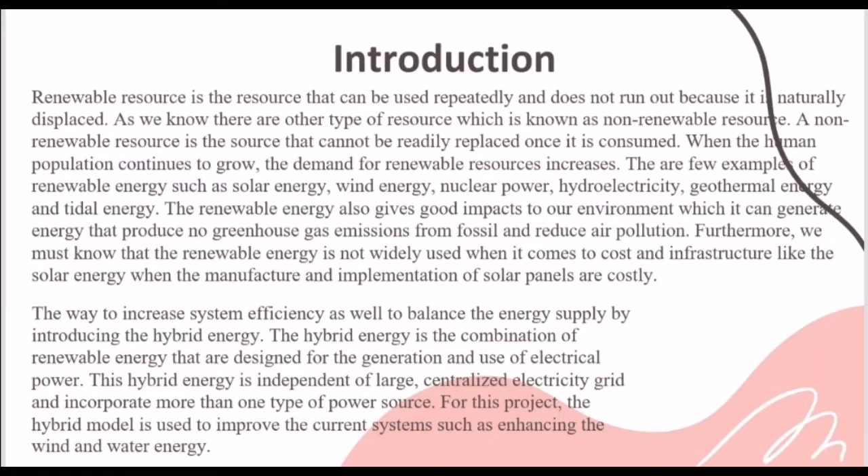Today, I would like to present the introduction. First of all, what is renewable energy?

Renewable energy or resource is the resource that can be used repeatedly and does not run out because it is naturally replaced. As we know, there is another type of resource known as non-renewable resource. A non-renewable resource is the source that cannot be readily replaced once it is consumed. As the human population continues to grow, the demand for renewable resources increases.

There are a few examples of renewable energy such as solar energy, wind energy, nuclear power, hydroelectricity, geothermal energy, and tidal energy. Renewable energy also gives good impacts to our environment, as it can generate energy that produces no greenhouse gas emissions from fossil fuels and reduces air pollution.

Furthermore, we must know that renewable energy is not widely used when it comes to cost and infrastructure, like solar energy, when the manufacture and implementation of solar panels are costly.

A different situation exists in the United States. Renewable energy is the fastest growing energy in that country, increasing 100%

from 2000 to 2018. The way to increase system efficiency as well as balance the energy supply is by introducing hybrid energy. Hybrid energy is the combination of renewable energy sources designed for the generation and use of electrical power. This hybrid energy is independent of a large, centralized electricity grid and incorporates more than one type of power source.

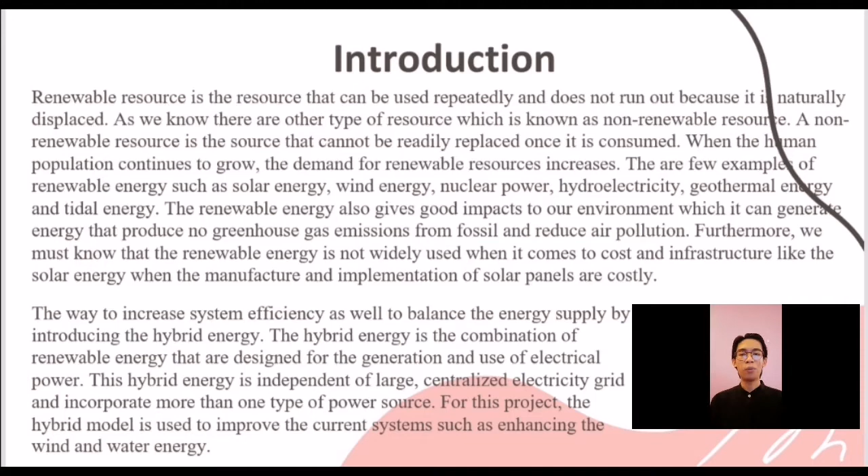Assalamualaikum, my name is Arif Azal. I'm going to present the wind energy and the improvement for wind energy. First, the current system in wind energy.

A wind turbine is a device that converts wind kinetic energy into electrical energy. Wind turbines are manufactured in a wide range of sizes with either horizontal or vertical axis. It is estimated that hundreds of thousands of large turbines in installations known as wind farms now generate over 650 gigawatts of power, with 60 gigawatts added each year.

They are an increasingly important source of intermittent renewable energy and are used in many countries to lower cost and reduce reliance on fossil fuel.

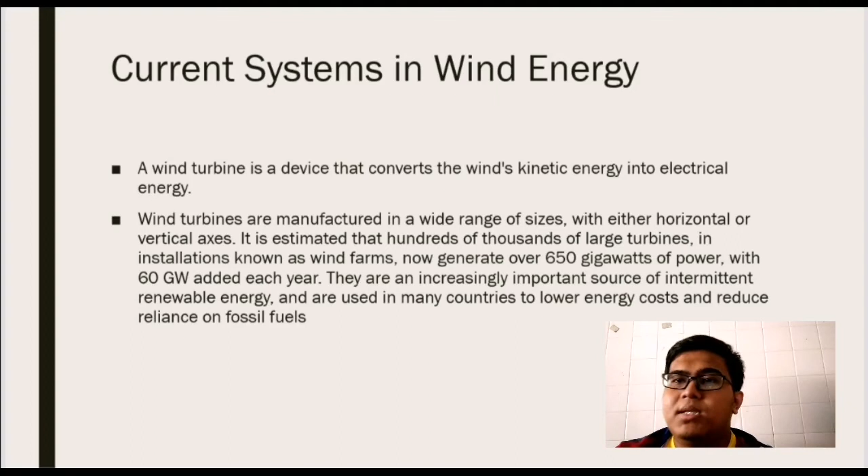Hi, my name is Muhammad Azrim Fuzat bin Samzul Fuzat, matric number AA191866. Now I will present about the new improved model, which is wind energy plus solar energy.

So for the wind turbine improvement, because the peak operating time for wind and solar systems occur at different times of day and year, the hybrid system is more likely to produce power.

Second, the hybrid system provides power through batteries or an engine generator powered by conventional fuels such as diesel. If the battery runs low, the engine generator can provide power and recharge the battery.

Next, the storage capacity must be large enough to supply electrical needs during non-charging periods. Last but not least, adding an engine generator makes the system more complex, but modern electronic controllers can operate these systems automatically. An engine generator can also reduce the size of other components needed for the system.

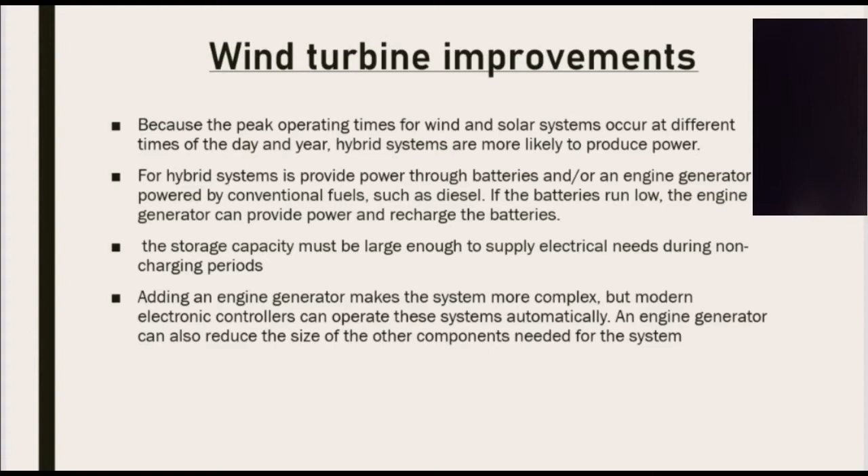Assalamualaikum, my name is Muhammad Haziq bin Osam, matric number AA191930. So I will present the current system, which is hydropower energy.

Hydropower is using water to power machinery or make electricity. Water constantly moves through a vast global cycle, evaporating from lakes and oceans, forming clouds, precipitating as rain or snow, then flowing back down to the ocean. When flowing water is captured and turned into electricity, it is called hydroelectric power or hydropower.

There are several types of hydroelectric facilities. They are all powered by the kinetic energy of flowing water as it moves downstream.

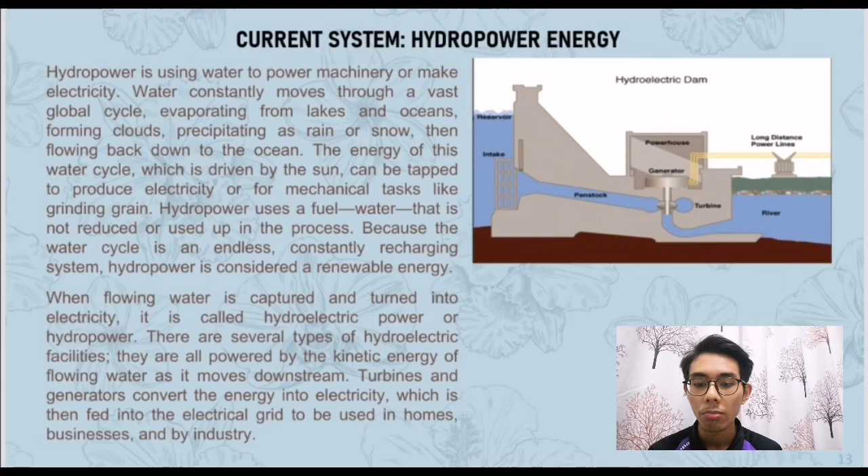Turbines and generators convert the energy into electricity, which is then fed into the electrical grid to be used in homes, business, and by industry.

For the advantages of hydropower energy: first, hydropower does not pollute the air like power plants that burn fossil fuels such as coal or natural gas. Second, hydropower is a domestic source of energy such as produced in the United States. Third, hydropower relies on the water cycle, which is driven by the sun, making it a renewable power source.

For the disadvantages of hydropower energy: fish populations can be impaired if fish cannot migrate upstream past impoundment dams to spawning grounds. Second, hydropower can impact water quality and flow. Third, hydropower plants can be impaired by drought when water is not available.

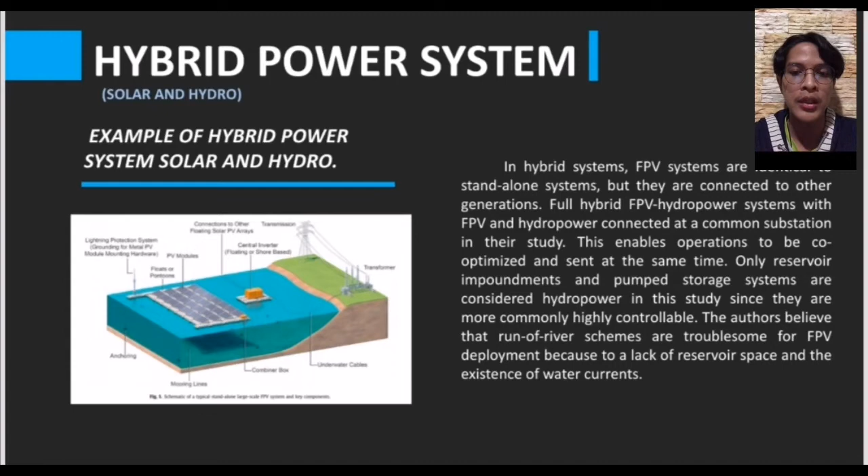Only reservoir impoundment and pumped storage systems are considered hydropower in this study, since they are more commonly highly controllable. The author believes that run-of-river schemes are troublesome for FPV deployment due to a lack of reservoir space and the existence of water current.

There is some value added to FPV hydropower. First, improved system operation at different time scales. Due to weather conditions, spatial resource characteristics, and daily patterns, solar PV power is variable and less predictable.

Hydropower systems, on the other hand, can provide a high level of generation control and storage to balance intermittent solar PV generation if resources are available.

The second is improved transmission utilization, meaning connecting FPV to existing transmission infrastructure could boost transmission line utilization rate if more transfer capacity is available.

The other value is additional energy storage opportunities, meaning different combinations of FPV hydropower hybrids could provide energy storage potential.

It should be pointed out that the underlying dataset for this conclusion may have bias, due to the fact that North and South America may have a more thorough hydropower database than other locations.

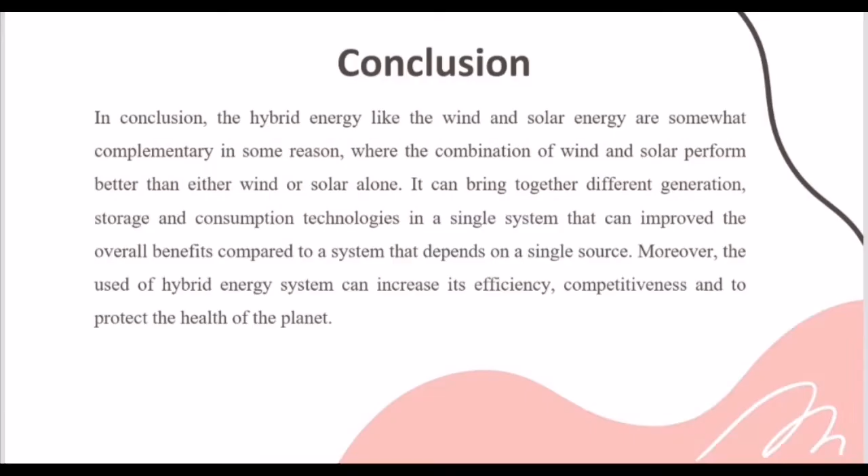So now I will present the conclusion. In conclusion, hybrid energy like wind and solar energy are somewhat complementary in some ways, where the combination of wind and solar performs better than either wind or solar alone.

It can bring together different generation, storage, and consumption technologies in a single system that can improve the overall benefits compared to a system that depends on a single source.

Moreover, the use of a hybrid energy system can increase its efficiency, competitiveness, and help protect the health of the planet. Thank you.